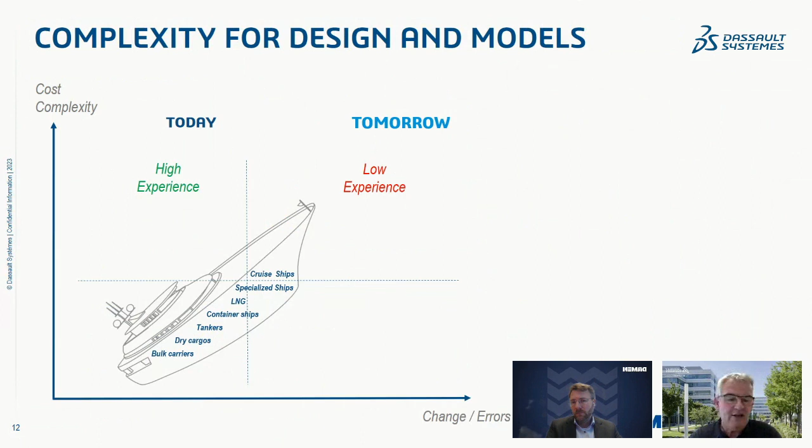However, because of the needed integration of these new systems on board ships, prior experience is very limited, sometimes empty, so several design changes and errors will be involved in the design process. This triggers many new needs from a design process perspective, in particular concurrent access to the 3D design data with high level of collaboration to avoid any silos, model-based system engineering to ensure consistency between requirements and the proposed solution, digital continuity to assess up and downstream impact from any change, and change management capacity and traceability, with more accurate simulation earlier in the design process. Each of these topics has high value considering the challenge of complexity we have to address.

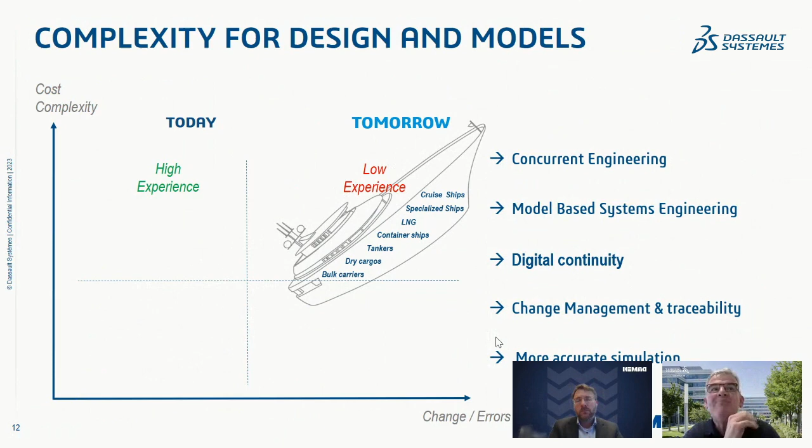It starts with the mission analysis, then moves to requirement engineering, system architecture definition, and design of all systems and components in 2D and next 3D, to next perform tests on the component, subsystem, and system, on the right side of the V model. But a simple document-based system engineering approach is far from being sufficient in our context.

Public studies show that for highly complex systems, most errors come from the early phase of design, but they are discovered late during the test of components and systems, sometimes on board the ship for many of them. Unfortunately, this is where the cost is 10, 100, 1,000 times more expensive for the error to be solved.

So this is where model-based system engineering with multi-physics system simulation allows drastically reducing the creation of this undetected error early in the design.

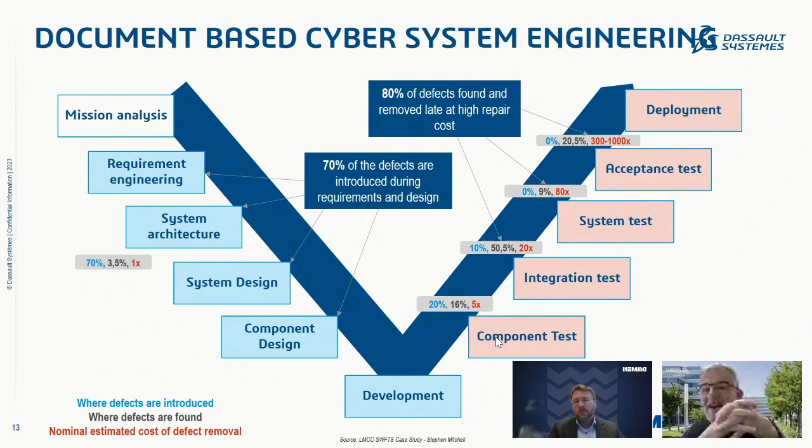In the context of designing a ship today, most commercial and naval shipyards already use specialized solutions, like 3D Experience or others, to manage requirements and perform project management, and to cover the processes of design and engineering, starting from initial concept design and next preliminary 3D design, 2D logical diagram definition, with the ability to perform various kinds of 3D simulation, moving next to detail engineering and manufacturing BOM generation, etc. So this is quite usual, and it provides a lot of value already for various kinds of complex ship projects.

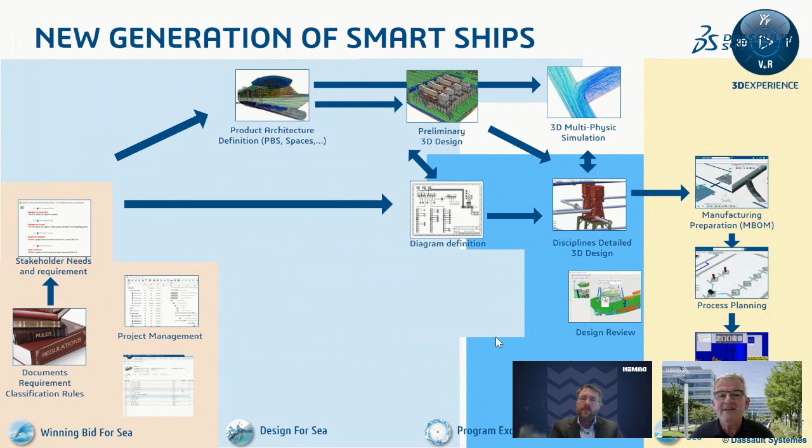But for this new generation of very complex sustainable ships, we need more. Without changing the overall process, model-based system engineering as a backbone allows, starting from a holistic description of the mission of the ship, driving the system architecture definition, ensuring consistency with requirements thanks to early system multi-physics simulation. It's also very valuable to define software architecture and next to test it.

Because it's model-based, it reinforces the capacity of collaboration between the whole discipline in any phase, for any kind of modification request or trade-off for alternative design. The changes could be managed easily in terms of upstream and downstream impact.

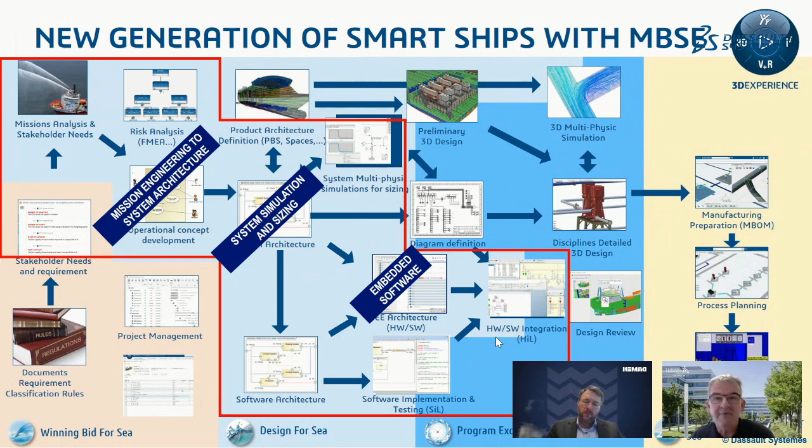Ensuring traceability and consistency. So to explain the value of the system multi-physics simulation, let's have a look at this example. It's a pedagogic one.

Imagine a container ship with reefer containers loaded in cargo hold. On board, there is also a generator and transformer. Theoretically, the generator needs to be used at nominal regime to optimize electrical energy distribution. The purpose of the study is to define a smart electrical switchboard to optimize electrical power distribution, taking into account various ship mission profiles. So let's start the video.

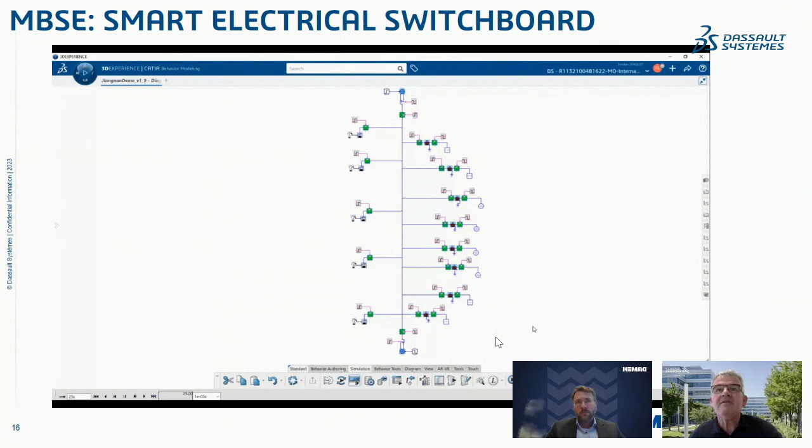Here we can notice on this model 4 cargo holds in the middle. This is a simplification, of course, for this example, each of them being packaged with a single dedicated component. There is also, you will notice, both thrusters, and next additional consumers like the hotel accommodation or the engine rooms.

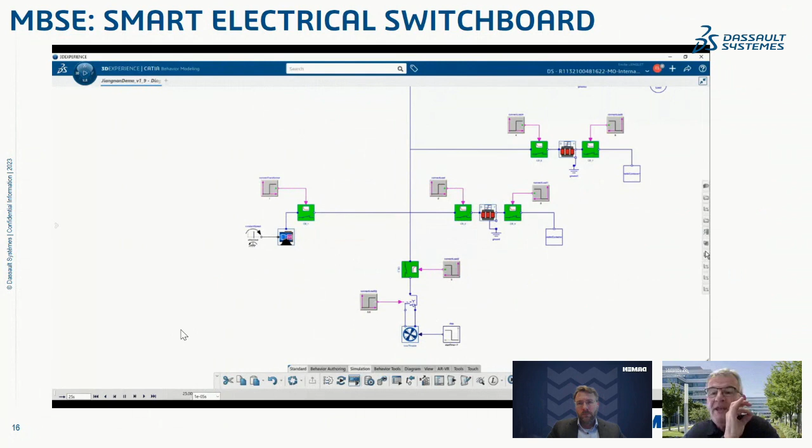The purpose of this simulation is to size and check the main component dimensions, cable, transformer, generator, by performing load flow simulation to analyze voltage drop and overloaded components with boundaries and controllers. This model will also allow predicting ship blackout early in the design phases by performing transient simulation for various mission profiles and analyzing inrush current when big consumers are starting, as we can see on some of the pictures here.

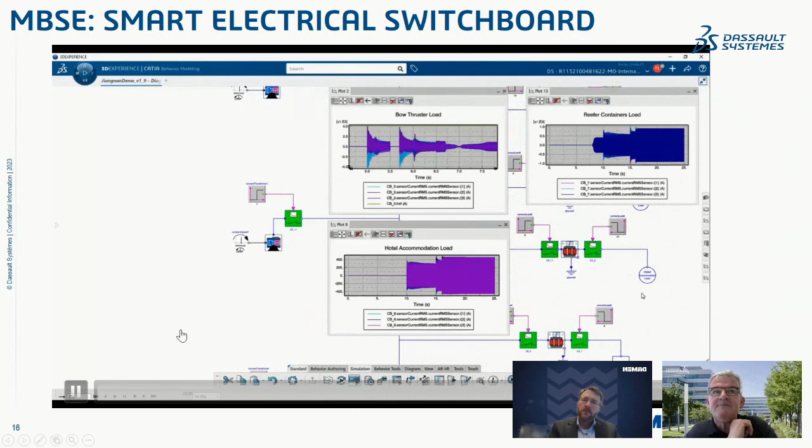So let us move now to a practical example of application which has been experimented by Damen and many other contributors using 3D Experience as a collaborative platform for design in the context of the European NAVAIS program. Joost, the floor is yours.

Thank you. So a few years back, we already saw this necessity to be able to do all those things that Francois just explained, but we needed to do that collaboratively with several suppliers, with the class society, and we also understood that there was still a lot to be arranged in the application landscape to be able to do it. That's why we started, or joined, the NAVAIS project, which we will explain a bit about now.

The objective of the NAVAIS project was to have a methodology to be able to develop low impact vessels. Sustainability is not just about emissions, CO2 or NOx, it's about all the emissions, all the damage, if you will, that the product does during its lifetime. As one of the main solutions to that, we see that we need standard and modular design principles to be able to mitigate those damages or risks. And as a third objective, we see that reinventing the wheel for every ship type over and over again is not effective.

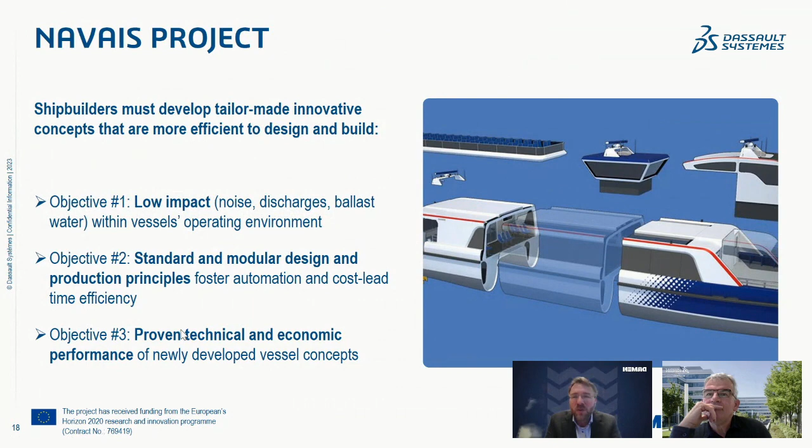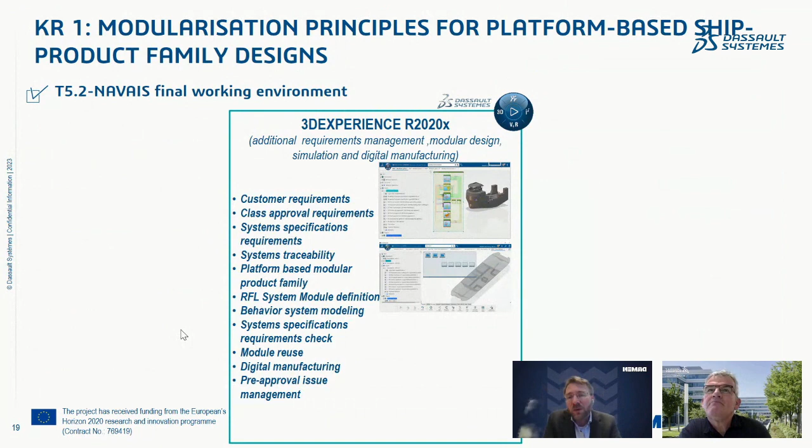If we go to the next slide, we'll see how the modularization principles were implemented in the whole application landscape. So we started with the 3D experience, and we're able to capture customer requirements, class approval requirements, all the way down to digital manufacturing and pre-approval issue management. But to do all of that, we've developed a landscape where all the suppliers and parties we work with can interact with the digital model.

For instance, to be able to do a proper resistance calculation with Marin, a specific integration has been developed. Same goes for the SEECAT calculation by Bureau Veritas, which we'll touch on a bit later.

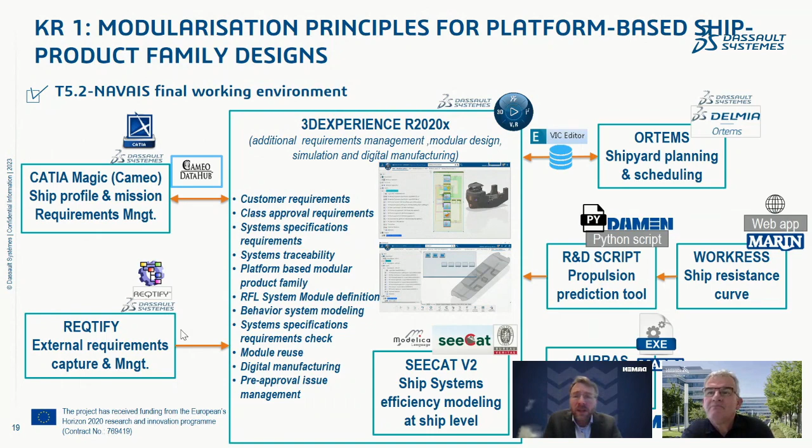All of that is now possible to do from within the 3D experience, integrated in an efficient manner. If we move to the next slide, what we're further developing is a module library where, from the requirements down to the logical level, we have a standard library filled with standard solutions that we can reuse over many ship types. This is very beneficial because you don't have to reinvent the wheel over and over again. You can reuse the standard solution and only integrate it into your design, but the principles and hopefully most of the parts and assemblies can remain the same.

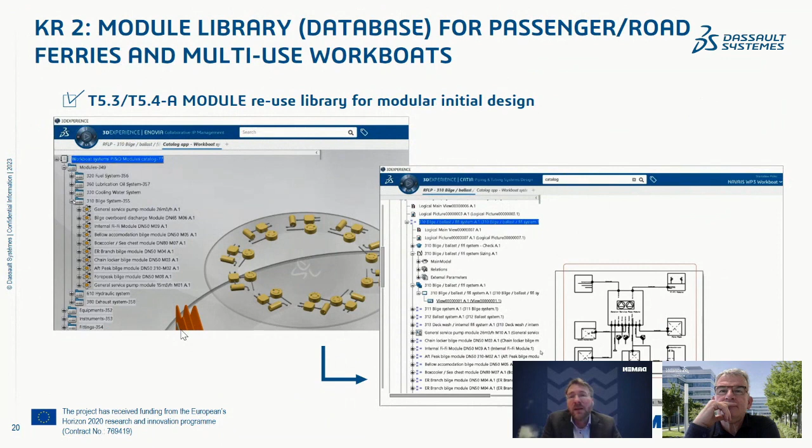If we move to the next slide, this has been effectuated on the RSD-E, for instance, the vessel we showed earlier. We haven't developed one single tug - we've developed a Damen e-drive system, which is modular in concept and applicable to many ship types. We're currently applying it to different sizes of tugs, but we've also applied the same concept to ferries. Although it's a very different ship type, the architecture, most of the parts, the control logic - all of that is the same, and in the future will be managed by the Dassault platform.

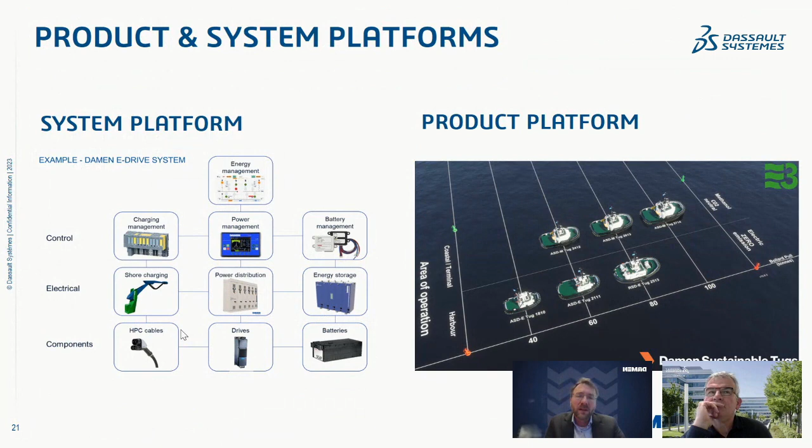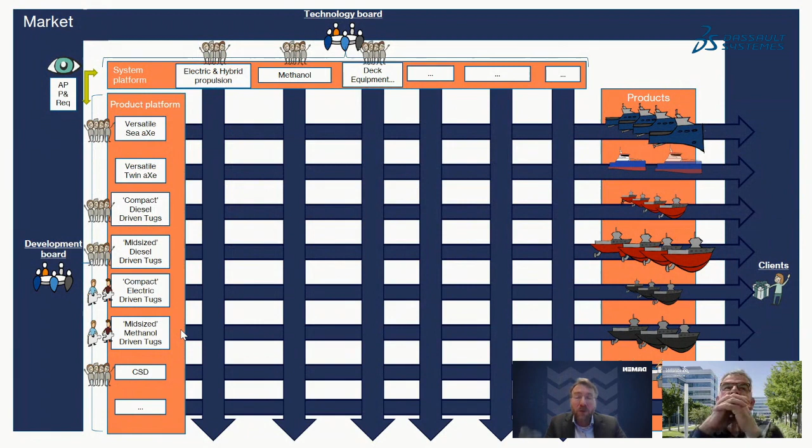So this is just an example of the Damen e-drive system, but we're expanding that across our entire portfolio. If you move to the next slide, you'll see a graphical representation of how that works. We don't think of our products as single ship types - we look at them as platforms, shown on the horizontal axis. We take a group of vessels that form a product family in essence, and we treat them as one platform, ensuring they're modular and can be scaled to the wishes of the customer.

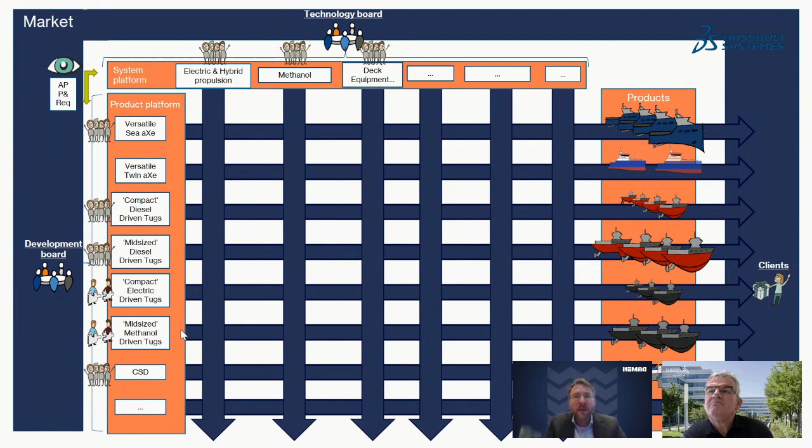On the vertical axis, you see the system platforms which are defining and driving across those different ship types. Now, if you try to do that for every single ship type individually, that's not sustainable and it's not scalable, because you're creating point solutions, and that's something we cannot keep up with in the future. So this is our way of looking at how to create sustainable ships - it's ships, plural, not a single ship. That's the way of standardization and driving commonality across those product types with the systems engineering approach.

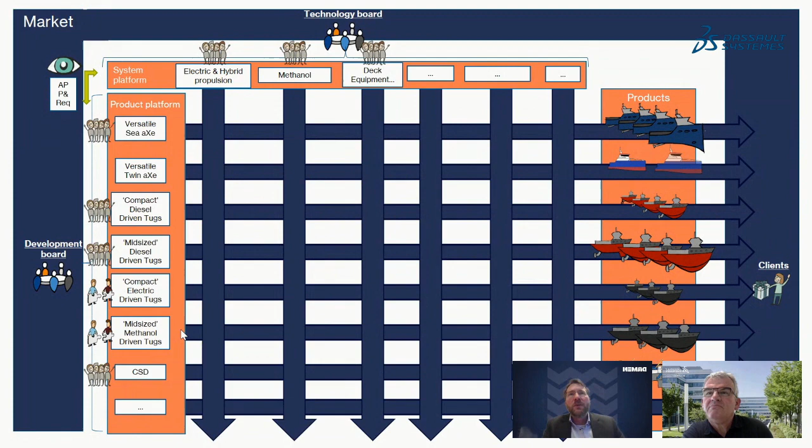As François-Xavier explained earlier. If we move to the next slide, this also gives you benefits in the production facility, because if you can have standard modules and even get them up to perhaps ship sections, that's going to give you plenty of advantages in the production process, since you can have the same people doing the same thing over and over again and standardizing the work processes.

With this modular production method, you can also start simulating the best way to do it virtually before you actually do it, experimenting on the workshop floor, which is of course a lot cheaper. You can run multiple scenario analyses and define the best way to do it for yourself. Sustainability isn't just about the ship being sustainable, but also about how you produce it - the amount of work and effort, the amount of waste created during production is a factor to take into account, as well as safety during production.

So this has been done, and we are currently in the process of developing it further. And then we move to the next slide.

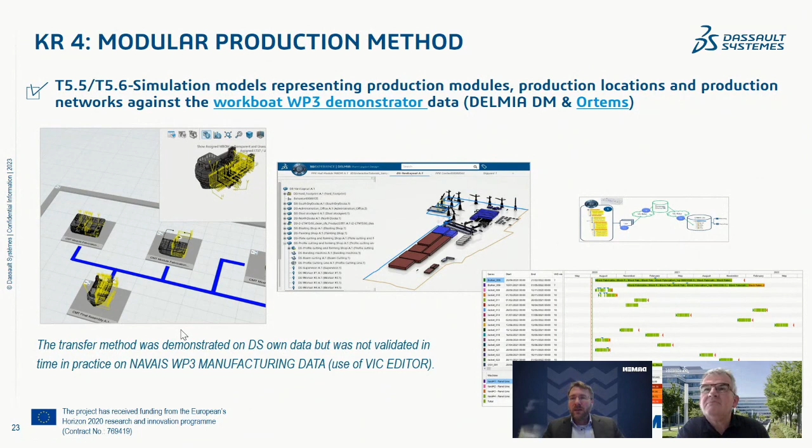This is the SEECAT calculation method or tool from BV, which has now been completely integrated into the Dassault Systèmes platform. In that way we can do calculations that are automatically verified by BV to be accurate, and do that in very early initial design stages to make sure you are complying as soon as possible with the class requirements.

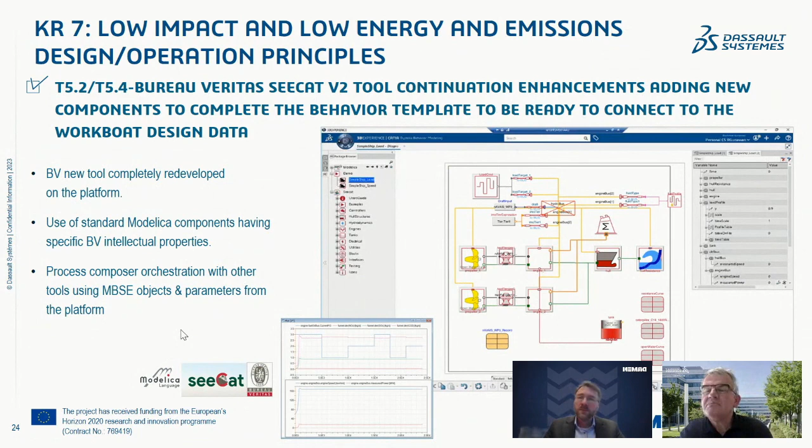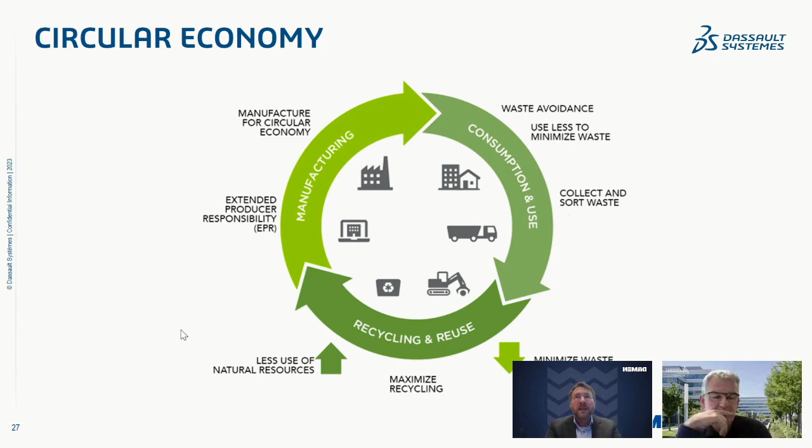The next slide is the RSD E, as I said. This is the culmination of all the effort that we put into working on a Damen e-drive, working on systems engineering, and this is one of the results of what we call a very sustainable ship. And it's not just about the propulsion system, which is fully electrical, but there are also safety features in there.

On the top left, you see we have electronic stability protection, which basically says that if the vessel heels too much, the captain will get an alert that he needs to interact, needs to take provisions.

It's also a much smaller vessel for the same amount of bollard pull compared to a conventional vessel. So it's very compact, so you need less steel, less of everything to have the same performance in the water.

To be able to do that and to have it controllable and course stable, you have a twin fin skeg design, which ensures that the vessel is controllable in all directions. And I could go on.

So the point I'm making here is it's not just about emissions, it's about every single aspect of this vessel. Sustainability, safety, environmental footprint has been taken into consideration all along, because it was written down in the requirements, translated into the functional, down to the logical and the physical, all through that systems engineering V-cycle. And that's the way to get that done.

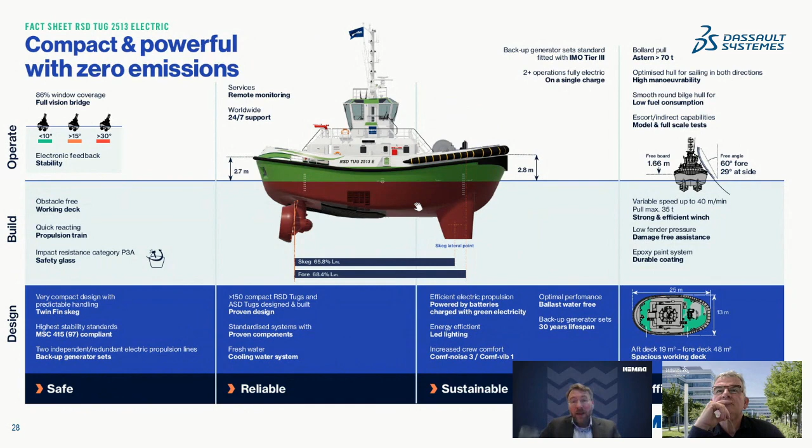I think we move on to the next slide. Thank you very much, Joost.

As presented with your example in the Damen Sustainability Compass, the environmental impact from cradle to grave is a key aspect of the development of the ship product as of today. In fact, since last July, the International Maritime Organization is enforcing the usage of life cycle assessment method for fuels especially. But it will soon be necessary to consider the life cycle assessment for the whole shipbuilding process.

So shipyards, and more generally the whole maritime supply chain, will be encouraged to demonstrate what is the environmental impact of their product.

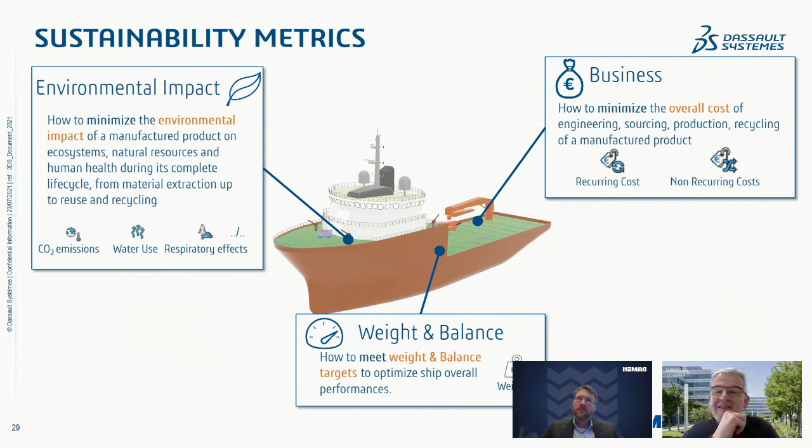It's not only to take commitment, but also to be able to share and demonstrate the footprint. So environmental impact will very soon become a metric to be monitored during the design and engineering processes, like the weight or the cost, as presented here.

In fact, raw materials have a high contribution to CO2 emissions because of extraction, transport, manufacturing, and recycling. So the reduction of the overall dead weight of the ship, or its size, will contribute to CO2 emission reduction.

But the lower the weight and the lower the environmental impact, the more the cost will increase. So this is opposite, and therefore a solution is needed to manage all these parameters in parallel, to make a trade-off between alternative designs and find the best balance between each during the design process.

It also allows comparing at any moment the targeted value of CO2 emission or other sustainability criteria, as mentioned by Joost, versus the computed one, and later the measured one, thanks to the virtual twin in operation and the feedback, the return of experience.

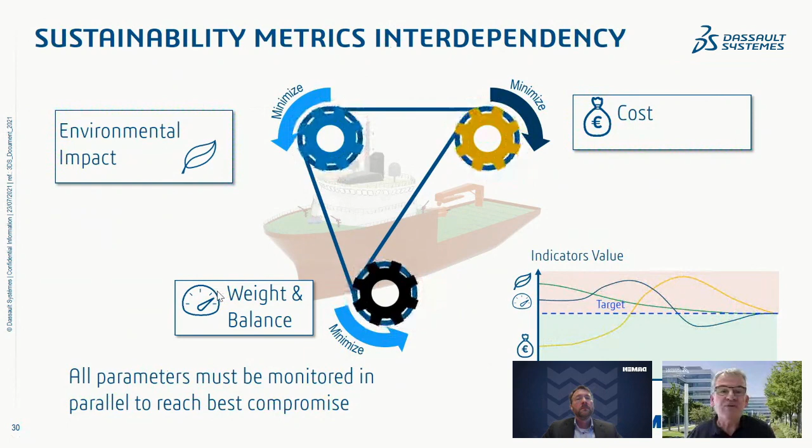LCA methodology, life cycle assessment methodology, and LCA solution are here to make sustainability KPIs and CO2 emission first, at the heart of the design process.

So for shipbuilding activities, it means being able to define, compute, and monitor the contribution of each single part, component, subsystem, and system of the ship, for any kind of discipline, directly from the 3D model.

For example, in the 3D Experience Platform, our LCA solution uses the EcoInvent database, which provides formulas for thousands of human activities and processes. And it could be enriched from your own knowledge or return of experience.

So, Joost? We have an example. This is the electric ferry that operates in Copenhagen, and it's already been in service for a few years now. And we, as an exercise, tried to do the LCA analysis on this with the toolset that François-Xavier just mentioned. On the next slide, you'll see the outcome of that.

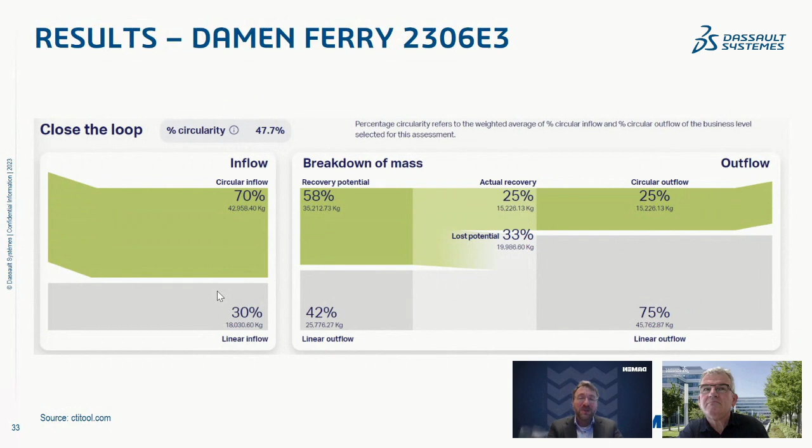But right now it's very hard to get that information all together. So to be able to do a proper LCA analysis, you really need to improve the data management of all those things just mentioned. Thank you very much, Joost.

Let's also have a look at this short video, because to check how the mapping of real data works -- I was talking before about return of experience of ships in operation -- real data in the platform, the 3D Experience Platform here, could help monitor the performance of the system on board, because it will impact the sustainability goals too, if we're able to continuously optimize the performance of your system.

For example, here the ship information system for energy management optimization will rely on data acquisition on board about the operational status of the ship and the main engines, like temperature, pressure, flow rate, etc. So remote onshore monitoring of this data will allow detecting, analyzing, and providing feedback to the crew in order to improve the energy efficiency of main systems and equipment on board. So let's have a look.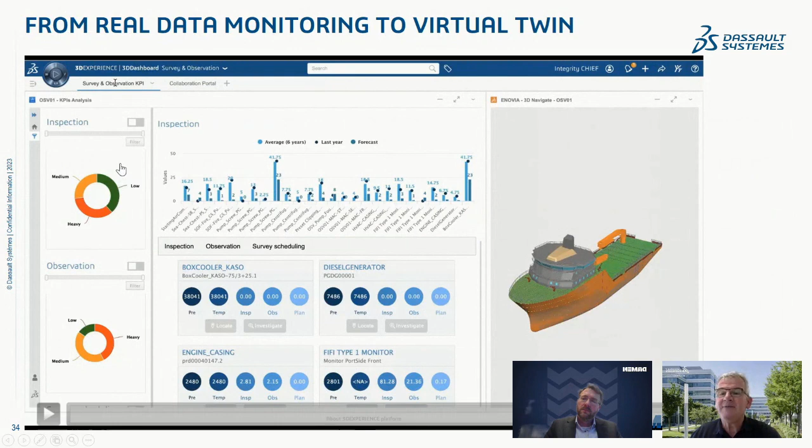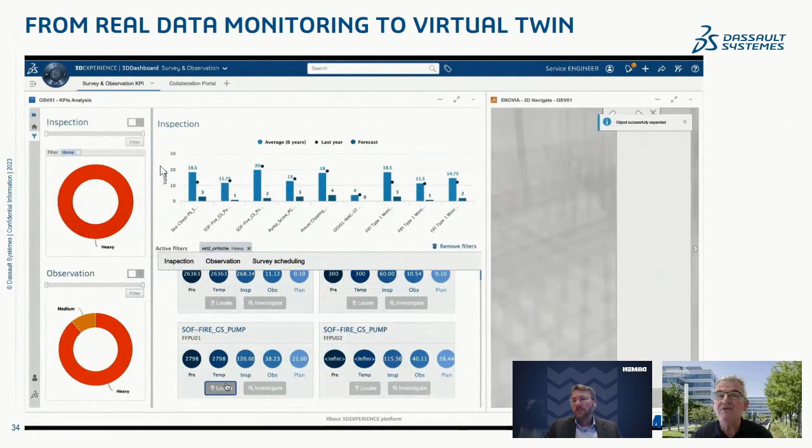Here, data are visualized through a set of widgets to have a clear view about the general status of the vessel at a given time. So specific KPIs make it possible to monitor them and issue a visual alert if something goes wrong.

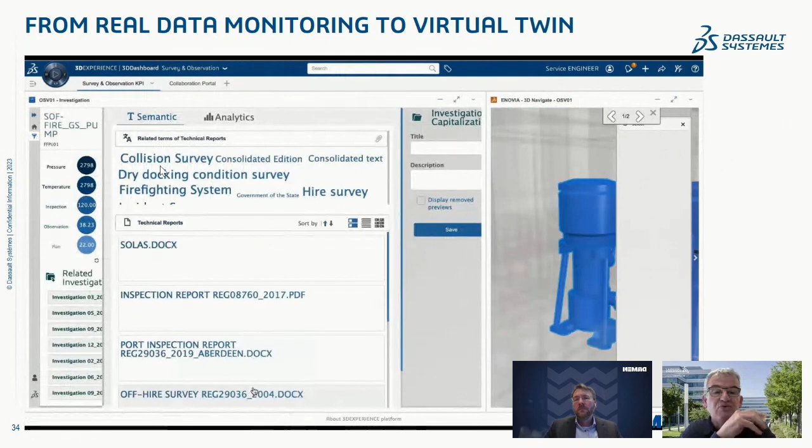It is of course possible to visualize the 3D model. You can then navigate from one device to another one connected to it, to quickly understand the context of use. Next step is to access the document associated with the system.

Here, the maintenance manual, but it could be a classification, regulation, or whatever. It's possible to capture remarks. You have access to the history of the equipment with a calendar view of its maintenance cycle.

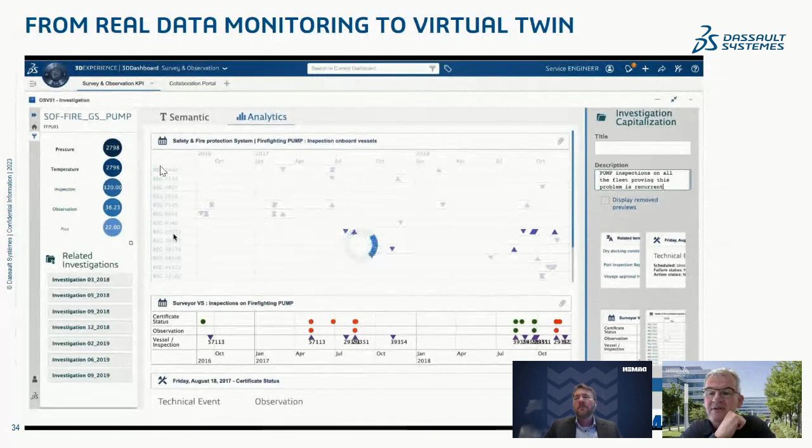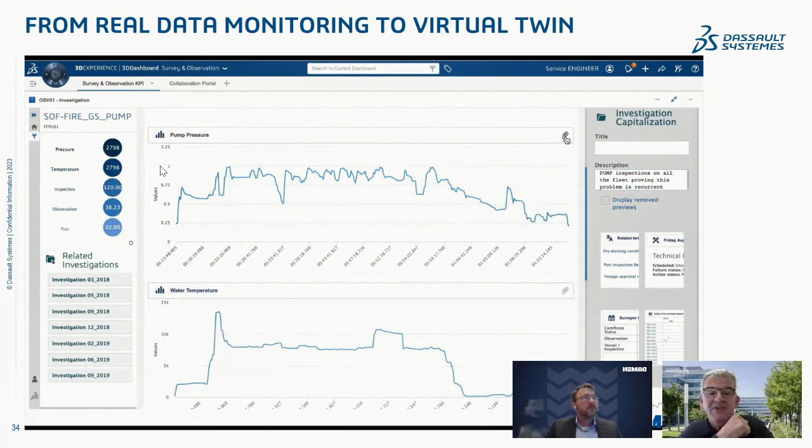You can review -- we'll see it very soon -- yes, you can review the in-situ measurements made on the component of the system to understand the cause of the malfunction and define a maintenance plan, creating tasks shared with the concerned actors. So the solution offers a very intuitive interface to analyze and converge toward a preventive or corrective action plan with regard to the maintenance or sustainability KPIs.

So let's conclude this presentation. So what do we see today in the market? A radical technological transformation.

Those transformations impact the whole ecosystem, because sustainability needs to be at the core at every step of the life cycle. From the initial concept phase to the ship in operation, all of the stakeholders, shipyard, design office, supplier, classification society, ship owner, and port have to be involved and cooperate together to address this challenge of integrating new technology on board the ship.

For example, a Green Corridor initiative already requires massive investment from port and operator, covering everything from bunkering facilities with alternative fuels, renewable shore power, ballast water treatment, and inland connectivity.

So platforms of collaboration for design and simulation, like the 3DEXPERIENCE, are really critical assets to support and succeed in this transformation, which is very, very challenging. So thank you very much.